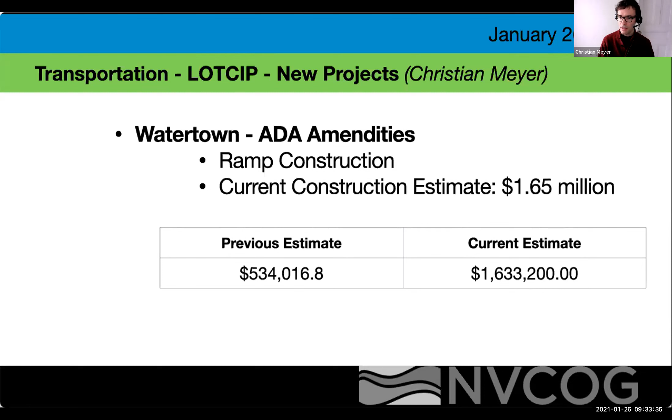Motion to approve the meeting minutes of December 1st. Is there a second? Second. Okay, all in favor? Aye. Aye.

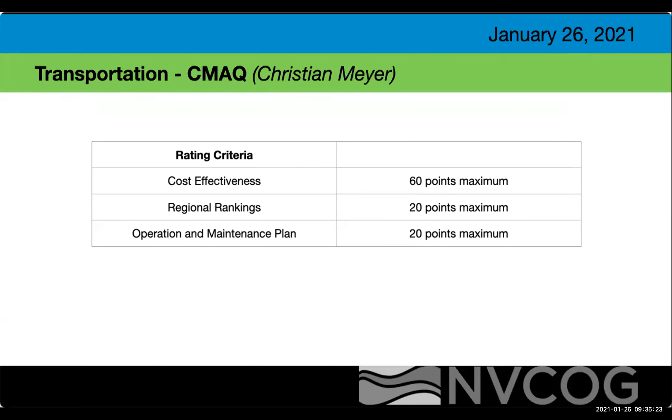For those who haven't had a chance to look over the emails I sent out, the goal of this project is air quality improvement. So if it's a trail project, a signal project, adding an extra turn lane to an intersection, diesel retrofits, we'll rank everything based on cost effectiveness, the number one ranking factor for the DOT. But it's a good grant program, 80% federal, 20% local for most projects. If it's a signal project with safety elements, it's 100% federal. Watertown's benefited from this program, with a project redoing about 15 intersections downtown. I know Bridgeport's done a similarly large project in their downtown.

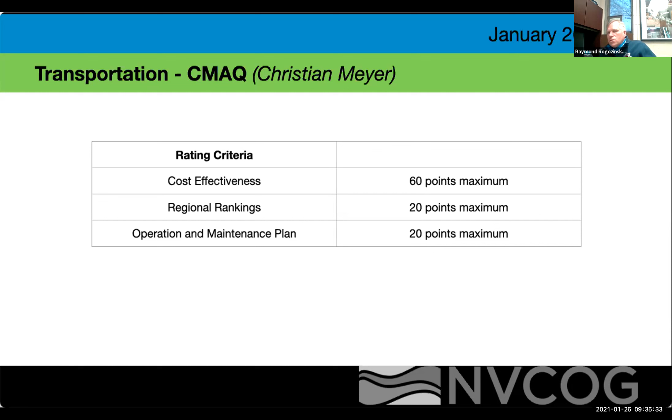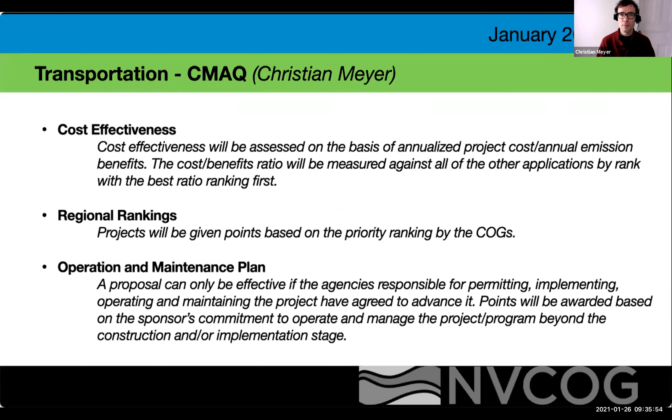So there's no motion required or recommended at this point, but municipalities should submit a project to NVCOG if they're interested. Bristol will definitely be submitting one for a traffic signal. Please be in touch as soon as you can. We'd like to give regional approval or endorsement to our program of projects, at the latest by next board meeting in the beginning of February. We wouldn't want to wait longer than March before we get the board's sign off.

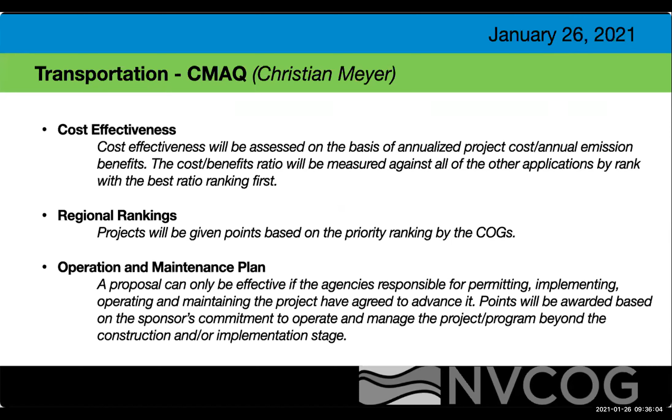Moving down, once again recapping the agenda since we didn't have a quorum, under new projects there were actually 2 projects. One was from Bristol, a Divinity Street culvert. TTAC generally concentrates on roads, but this culvert doesn't qualify for any other funding, which is why we'd like to move forward with the project under LOTCIP. Beacon Falls Burton Road has an issue with a roadway section that includes retaining walls, and the road is currently shut down. If there are questions we can go back and recap it completely.

Otherwise, you're looking for a motion to recommend acceptance of the new projects into the NVCOG LOTCIP program. I'll make a motion to approve the new projects. Second it. All in favor? Aye. Thanks. Aye. Motion passes.

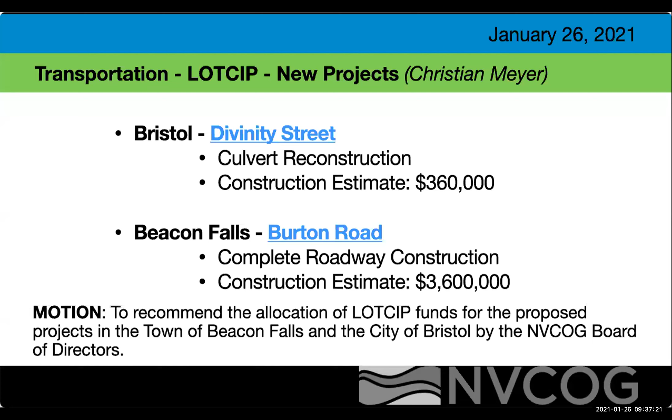For the Watertown ADA ramps and the Seymour projects, we talked about it, but was there a motion made, Christian? Not yet, no. So under that item, there's a recommended motion for acceptance of the cost revisions for the projects already in NVCOG LOTCIP. So a motion to approve would be in order. I'll make a motion to approve. Is there a second? Second it. All in favor? Aye.

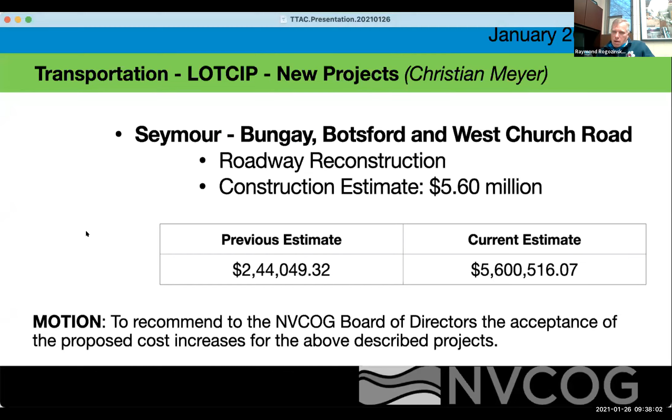Any discussion? No? Okay, so now we're on to a hazard mitigation plan status update with Aaron. Good morning, thank you Ray. We actually have 2 planning processes going on simultaneously right now: one is the natural hazard mitigation plan that many of you have been involved with, and the other is Resilient Connecticut. SLR, formerly Milone and MacBroom, is the consultant on both. David Murphy is here today to give a quick update on both projects.

Hi everybody. First update is the hazard mitigation plan — not much to say, but we have a big workshop scheduled for next week on the 3rd at 9 a.m. for all local coordinators and other municipal staff. This will be the second and final of the 2 regional workshops for this project. As always it's a low lift — if you attend this one, you'll be done dealing with us for a while until the adoptions are upon us, but please do attend next week. That's where we'll talk about the municipal actions that come from the state. Some of these hazard mitigation actions might sound foreign when you read about them in your plan, so attending the workshop lets you hear about them before you read about them.

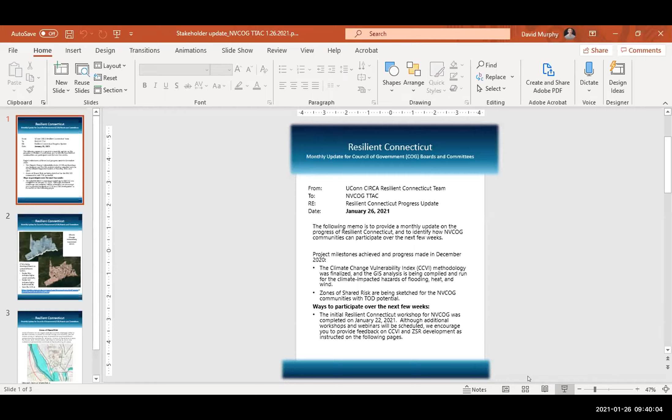Got it. Excellent. All right, so we have this flyer that we're using for all of the COG meetings, and I need to switch back.

So what's going on in this project, Resilient Connecticut? We are still working with CIRCA. We're about halfway through our year-long assignment to help them advance their resilience tools and get to these pilot projects that we've talked about. We do expect that there will still be 5 pilot projects selected in the NVCOG region, probably in the communities that have the TOD potential.

I think I gave this update a month ago to you guys. It may sound familiar, but this is just a quick update. We've done a lot of work on the Climate Change Vulnerability Index and the zones of shared risk. We had a workshop last Friday for NVCOG that some of you may have participated in, and we essentially looked at this tool - the Climate Change Vulnerability Assessment, or Index, CCVI.

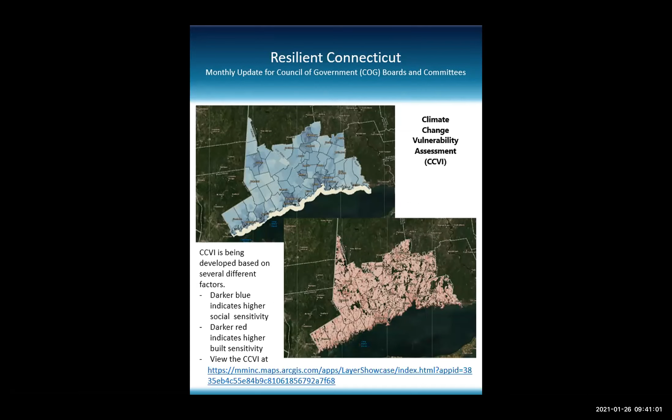I've sent this flyer over to Aaron, so he has it. At the bottom, there's a link to a viewer tool you can go and poke around on your own.

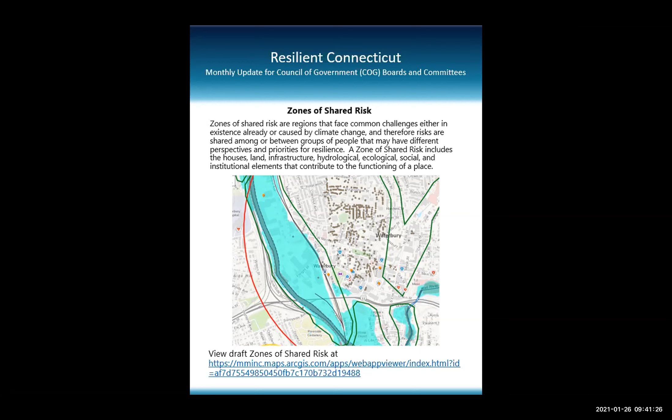We've also made some progress with zones of shared risk. This is kind of a snapshot of downtown Waterbury, where you can see a couple of zones of shared risk, which are essentially flood zones that are near one another. There's a link at the bottom of this page as well to a different ArcGIS online viewer, where you can look at these draft zones of shared risk. And that's it - we'll be back in front of you again with more updates.

Thanks, David. Thanks.

Aaron, any more information on hazard mitigation status? No, that's it. We're on track to finish on time, and I think all of the local meetings have been completed. Is that right, David? I think we have one more, Town of Seymour, which has eluded me, but I'll work on that.

Okay, and then moving on further on the agenda, under emergency management update, Joanna. Yeah, thank you for the time today. I'd like to talk about today 2 things.

First of all, Tropical Storm Isaias. Back on January 13th, former President Trump approved the disaster declaration. So in the works, through the regional coordinators, reimbursement is happening. If you have any questions right now, go through your regional emergency planning team regional coordinators - that would be John Field, Jacob Mankey, and Bill Turley. I'd also want to highlight...

Excuse me, yes, before you move off that item - so I guess obviously we will contact our regional coordinator, and maybe this is too specific, but for Bristol's case, we submitted a preliminary assessment. We provided backup, but it was a preliminary assessment. Are they just making reimbursements off of that, or are they coming back asking for more information?